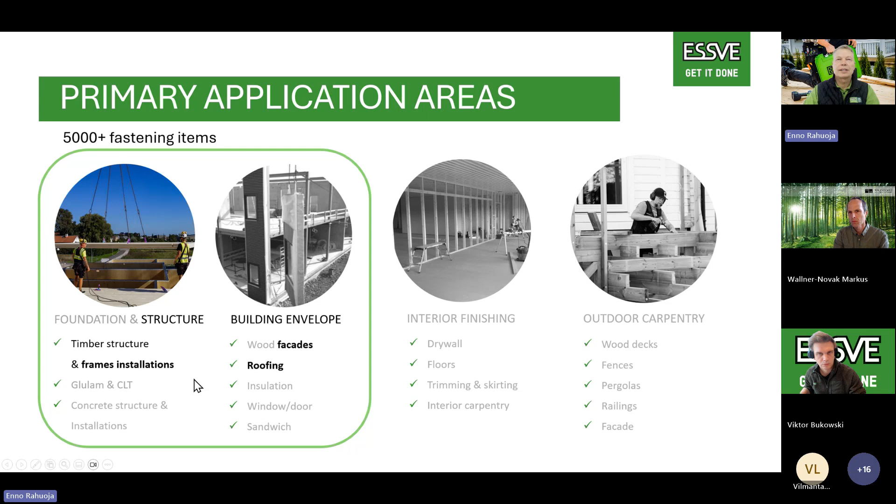What I wanted to say is that those are our 4 core focus areas, and today we are able to put together that green circle here, where we talk about roofs and facades, which is kind of the building envelope, and then it's a frame installation system. So this is the subject where we dive in from our mix of product range. We actually go deeply only into that insulated wall or roof area.

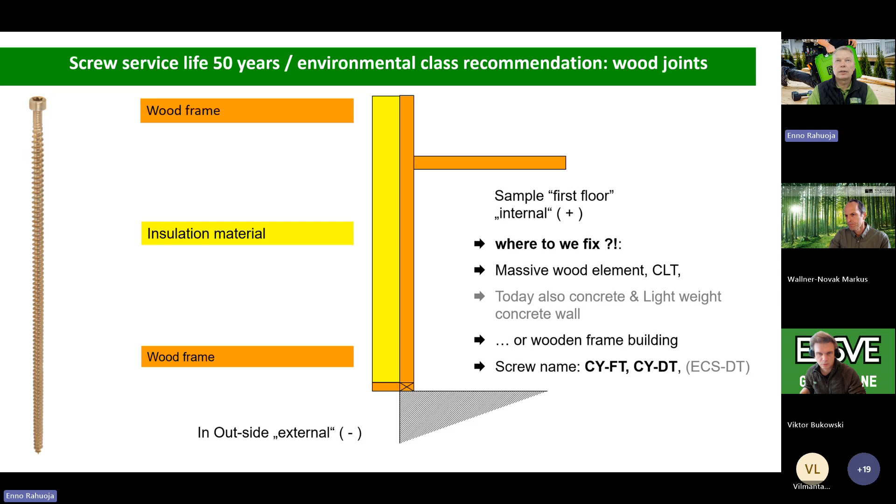The subject shortly. When you have some kind of timber frame wall, then in a frame wall, it's an option to put full insulation on top as the first step. Normally you build that up with brackets or a cross batten framework, but today's subject is you can have full insulation on it. Then normally you're going to have the wind barrier, which makes this application internal. And in this application, we are looking at a 50-year working lifetime. And I have put here some recommended environmental classes for the wooden joints as well.

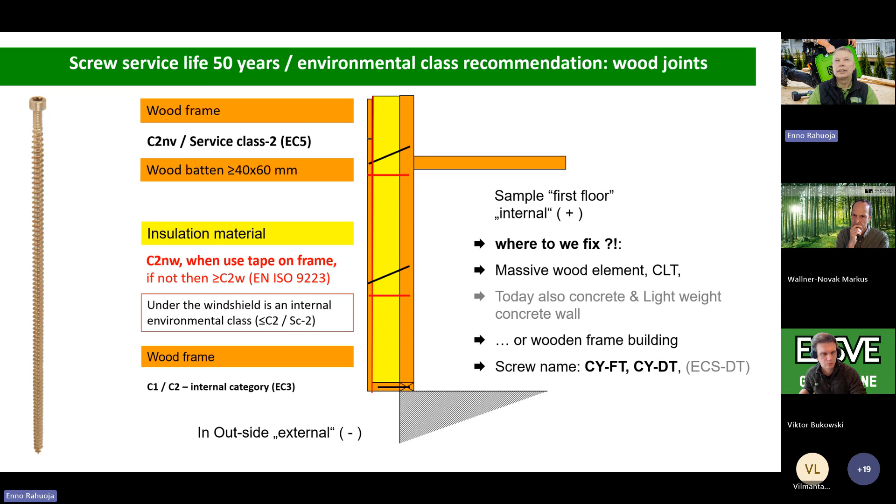Now we're coming to the framework. The framework we normally fix first with 2 or 3 screws to get it leveled, but also cross-fixing, so we get the frame nicely fixed. And according to the calculation tool, we do the distances here. In the next step, you need angle fasteners, which take all the vertical loads. That's also according to the calculation tool we're going to introduce later, and then comes the facade. So this is pretty much the subject Markus will dive into. He is our support person and developer of our so-called software.

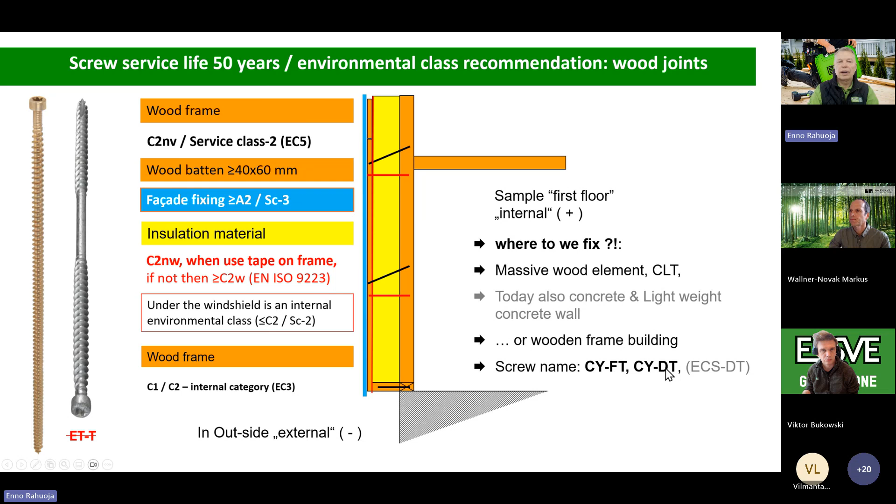I will remark that in the ESSVE range we have the well-known ET-T screw, which is a double-threaded screw. I have marked it red because the double-threaded screw ET-T is not recommended for this application, because here the second thread has a different geometry and has a traction effect, which means it pulls elements together. And when you fix it, it's difficult to install and level the facade framework on it. So for that, we have other fasteners. Either you use a full threaded screw from the ESSVE range, or we also have a double threaded one with the same geometry, called CY-DT. This product also has ETA approval, and it is approved for roof and facade, having CE marking.

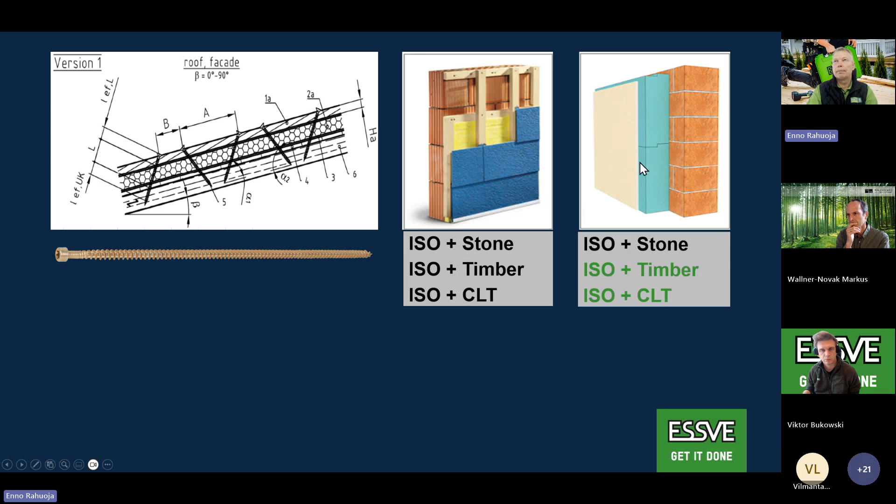Here on the right hand side, you see typical facade elements where you build that up. I have a brick background, but it could be cross-fixing of different timber applications, or it could be a wooden wall with an ETICS type of solution that you want to renovate. So you can do it for CLT new buildings or renovation if there's timber behind it.

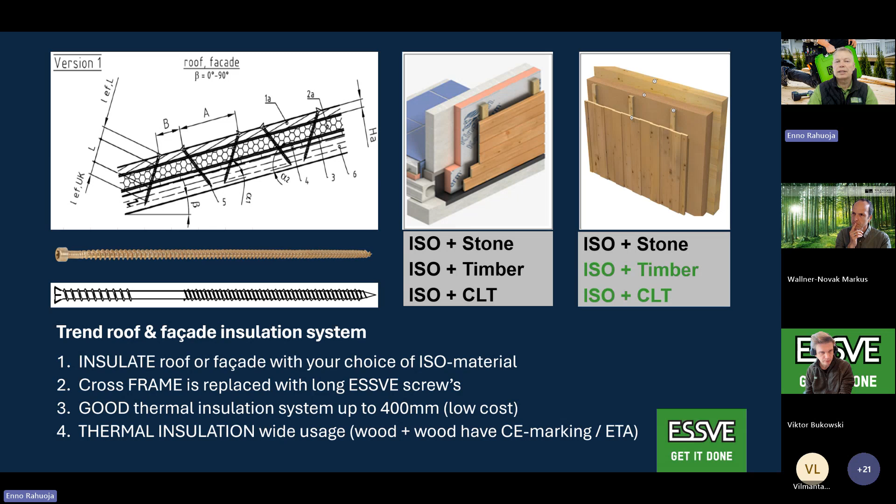We have 4 key arguments. Insulation in roof and facade areas. A cross frame is not needed, so you can replace it with screws. Good thermal insulation up to 400 millimeters. And thermal insulation has a wide usage area. In Eastern Europe, we also develop further on timber to concrete applications, but that's not today's subject. Today is more timber to timber.

But here we go. We have Markus. You will get the overview of the description. He's a timber construction software developer and leads research projects on fire protection, timber construction, and timber connectors.

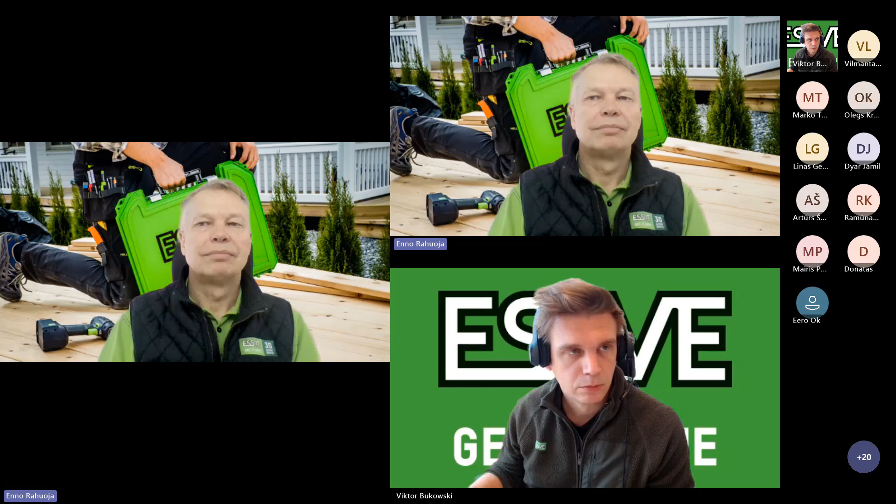So I will share my screen. What I want to do is give you a short overview of the systems, a little bit about the technical background, and then dive into two examples: one for the facade and one for the roof. It's always brief when you show a design tool—you can only show a little. But as an engineer, you have to consider more. It always looks very easy when you show it, but that's in the nature of this.

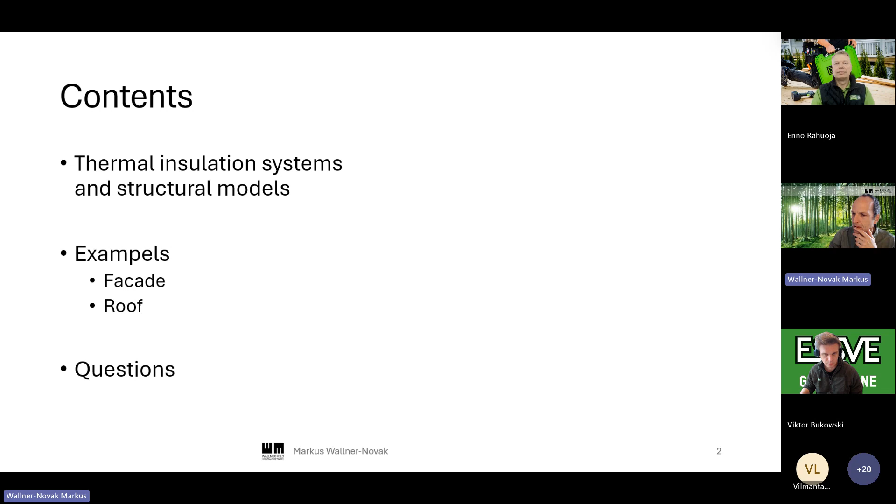So I start with the roof because that was the last slide we saw. There we have two different ways to either newly install or, very often, to refurbish and thermally insulate later.

The one is with so-called hard insulation. It's a more or less incompressible insulation, and the screws hold the roof structure against sliding down, so they are inclined. There's a mechanism where the screw goes into tension and the insulation catches the compression part, which is not much, but it can transfer it. On the other hand, we have a few screws responsible for wind suction, depending on the weight of the cover, and the other screws.

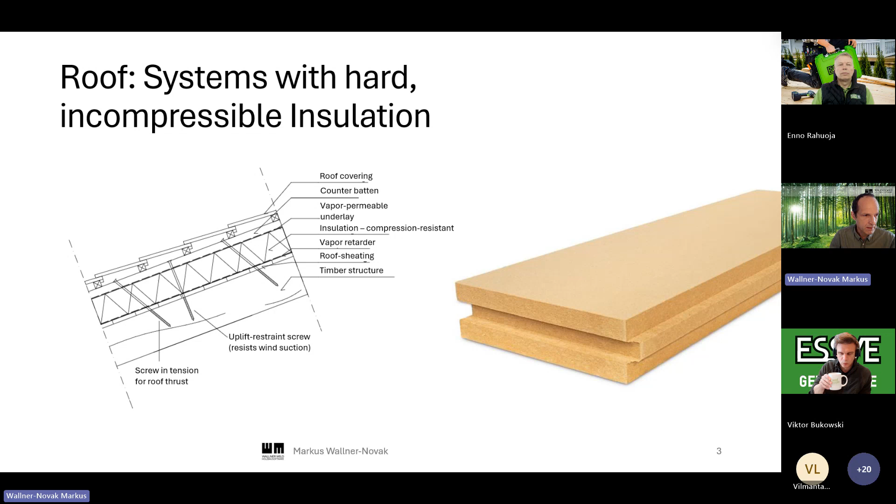Then there is a second system where you can use soft insulation. There it's more like a stilting system, so the insulation just insulates and doesn't carry any compressive loads. You keep a distance—it could be a void as well, but you want to use this space for insulation. So these screws are in compression and tension, and depending on the loads, you transfer the loads through the screws, which keeps the distance.

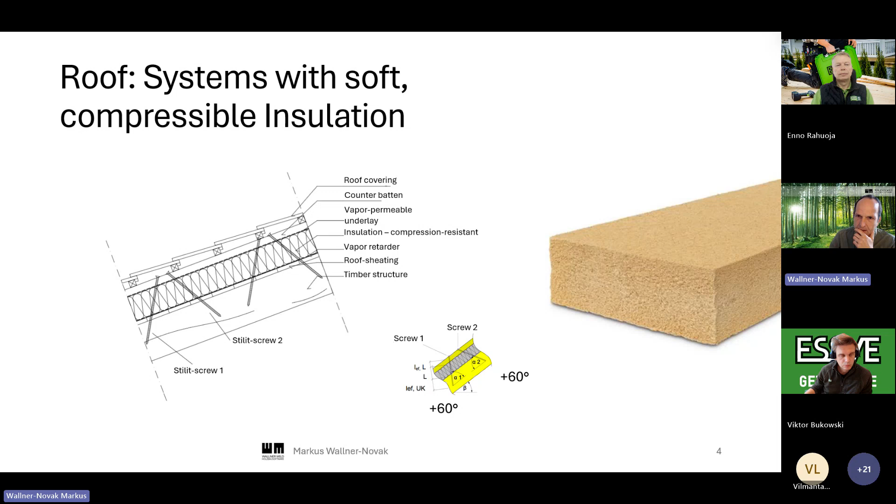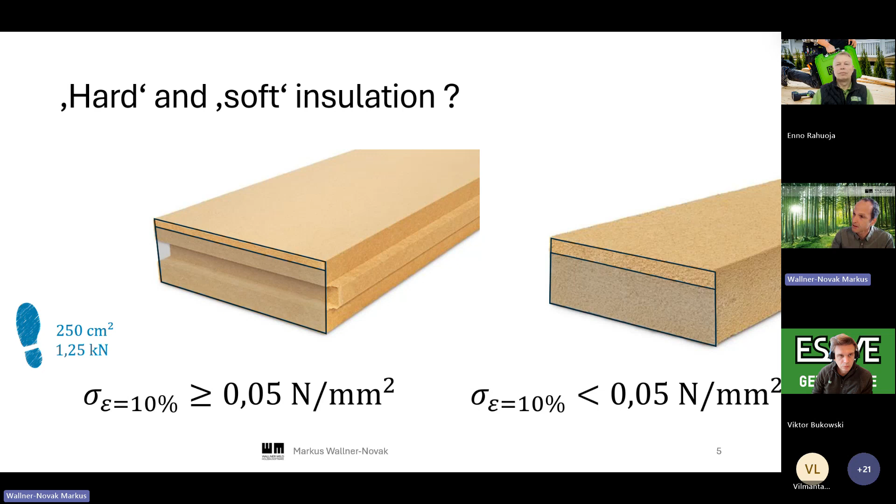There's often a question about the difference between so-called hard and soft insulation. It's not a very exact term, but the difference is the stress you can apply until the strain is 10%, which is 0.05 Newtons per square millimeter. If you calculate it—easier to understand—if you step on this insulation, you have about 250 square centimeters at the bottom of your foot, and a heavier person would produce this stress. So if you step on it and it compresses more than 10%, it's probably soft insulation; if it doesn't compress much more, it's considered hard insulation. The producers usually define this, and we have different products in the software as well.

Then there was work to do with the modeling and what can break—that's the engineer's job. Murphy's law says everything that can go wrong will go wrong, and we want to avoid this. So that's our way of thinking: we consider all the different mechanisms that can lead to damage, to prove that they won't.

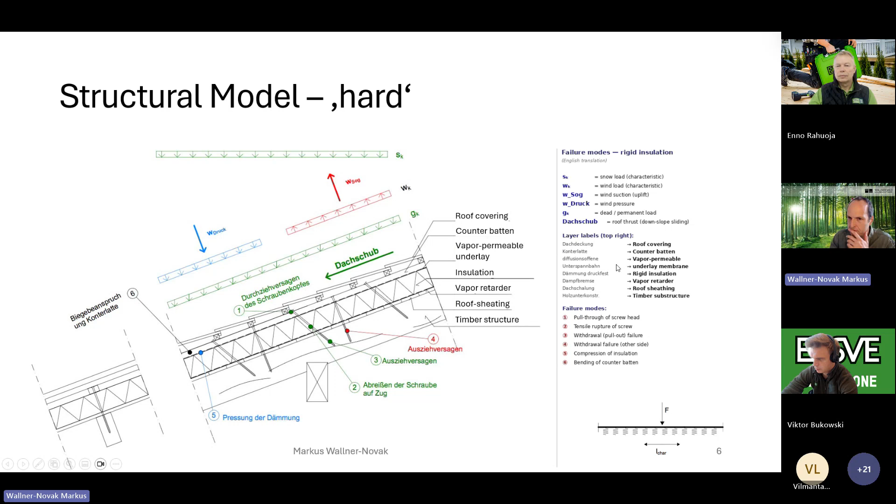This is a bit mixed in language, but I added translations so it's understandable. We have all the different failure modes from the screw and wind suction—shear from the roof, and different failure modes—and the software checks all these modes. We have different loadings: snow, wind, and self-weight are usually considered in the software. It's a little more difficult in terms of statics with this stilt solution.

Because then you have to find some structural systems. The counter batten works as a light beam on top, and then the stilts are like supports, like in this diagram here. And you can find some moment lines and can solve this. That's not so much of a problem, but that's a bit beyond the European technical approval that ESVE has, and that's implemented in the software.

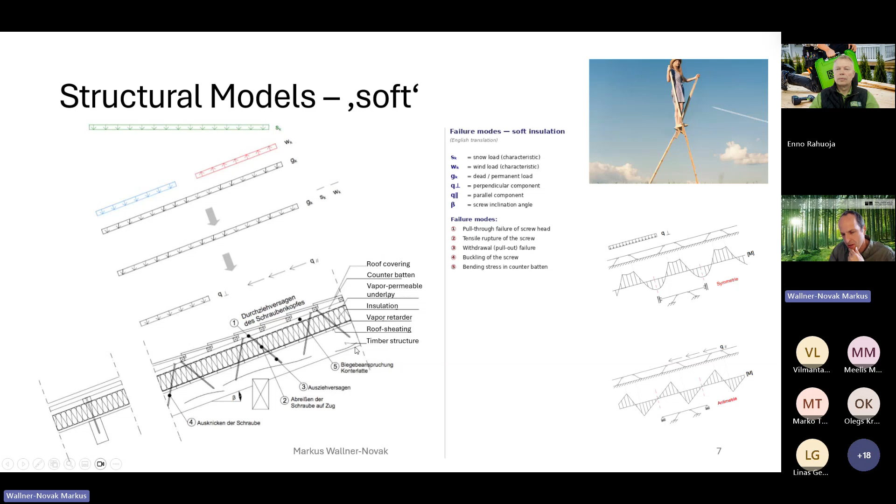So the roofs are a little bit more complicated in terms of structural models. So this we solved first, and then we continued with the application in a facade.

And I will, in terms of examples, start with the facade system that Enno just also showed. Usually we have one screw vertical and one inclined, and you can set as ever you want. We could also tilt both screws. You can define these angles here, the top screw and the first screw and the second screw can have its angles. In the roof, it's usually 60 degrees, like we saw here.

So they're both inclined, and in the wall, as Enno also said, usually you set the distance first, and then you screw the additional lifting screws for the vertical load. And here you only have self-weight usually as load case. The screws have to carry the additional structures here, and you have wind compression or wind suction. That's the thing here. There's no snow load or something, that's clear.

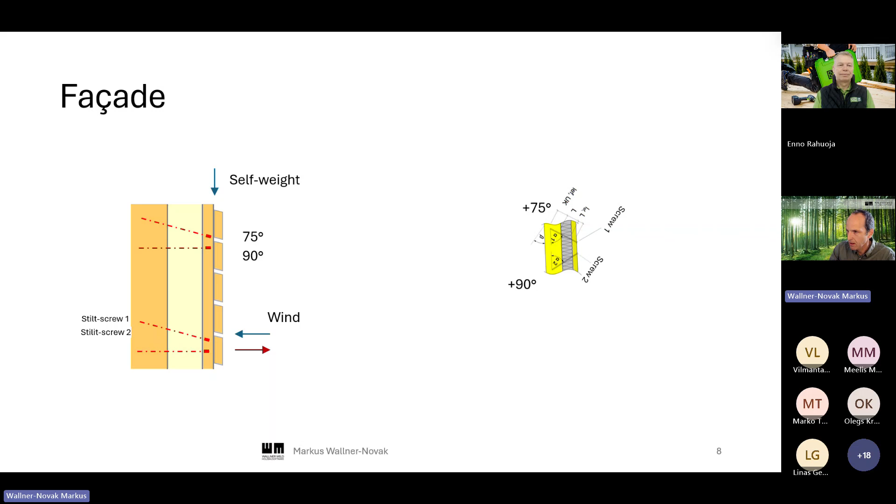Yes, so this is about the main structural thinking behind the programs we have. And I want to show you two examples just to see how the program works and give you some hints how you can apply and use this.

So we have one with a rather thick insulation of 320 millimeters, soft insulation. So this is compressible, and the screws have to take all the load. There will be no help, so to speak, from the insulation, no load carrying help. And then we have no loads, no other than the self-weight and the wind. And I used the counterbatten rather thick then because the screws need to have a certain amount of thread in the counterbatten, so you have to have a bit of a section there.

And the substructure is not really important. I chose 20 centimeters. It could be less. In CLT, it's sometimes only 12 centimeters. That can depend from case to case. And then, as I said, the screw angles will be 90 degrees for the first screw and 75 degrees, so it's inclined for the second screw.

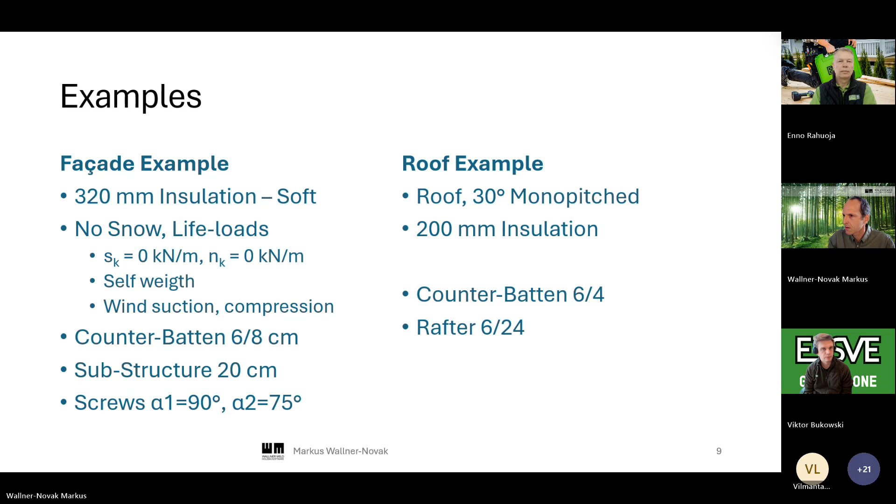And then we start with a second example for a roof. So to come to the... I just changed the screen. It's easier for me then.

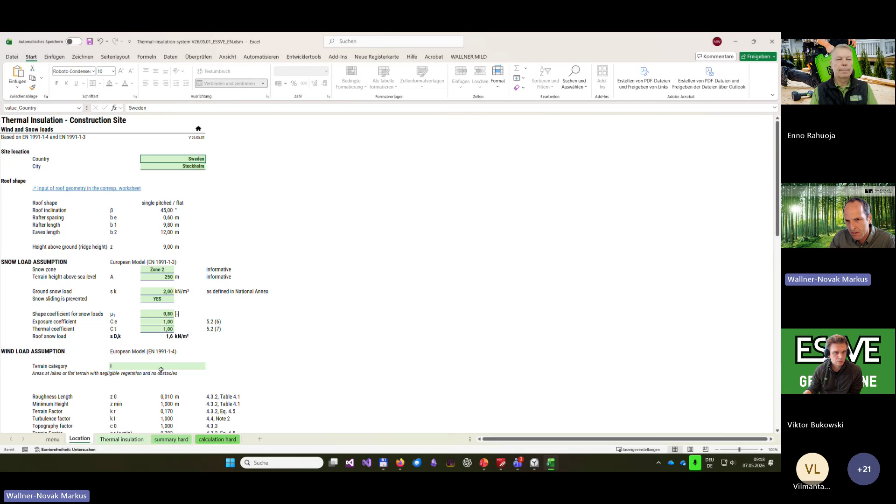And then the structure is relatively straightforward. You could set data from your site location. That's more for the roofs than for the facades. I will use that for the roof more than for the facade. So because we want to have the snow and the wind load, we could do this also. Maybe let's do this also here for the facade, because we want to know about the wind.

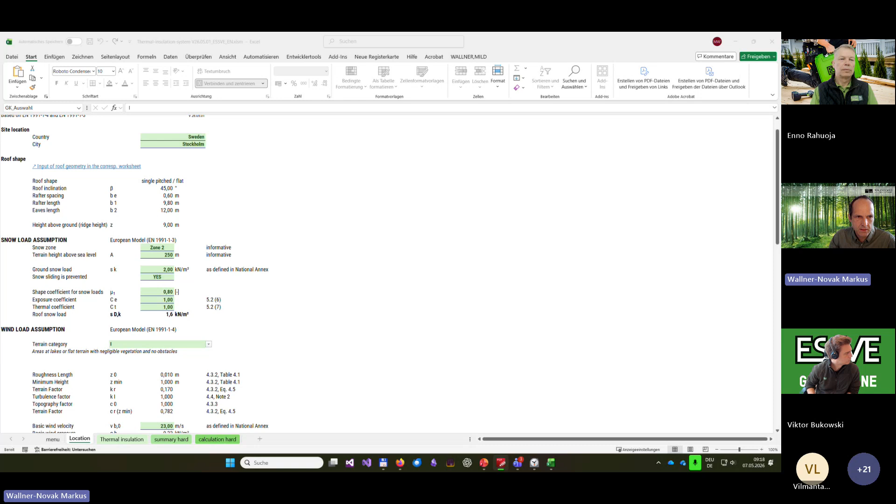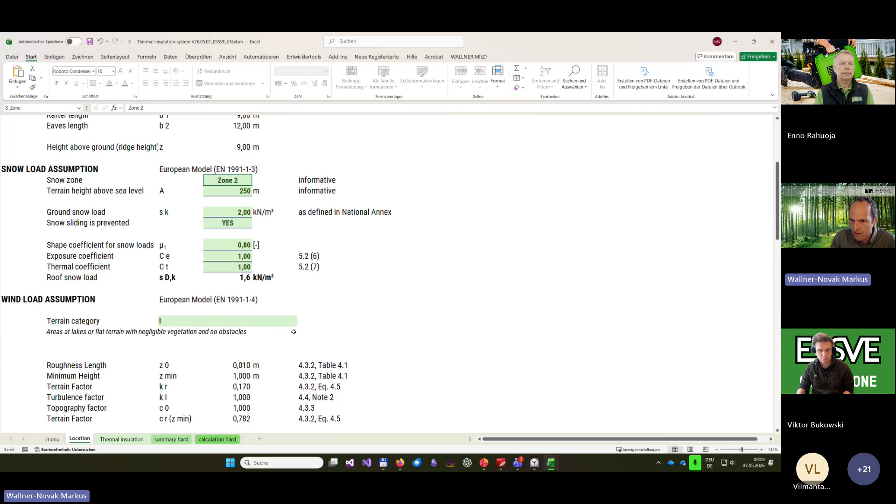So we could just set some values here. So we want to input some data here from Estonia, Tallinn, for example. The geometry will be set later, and then the snow load is not really interesting, as I said here, for the facade system, but we could say we are in terrain category 2, and our basic wind is maybe 21 in Estonia, meters per second, right? So then we get this peak velocity depending also on the height, the ridge height, which we will set later. So it could change a bit, but we preset the place and inform the program how wind will be.

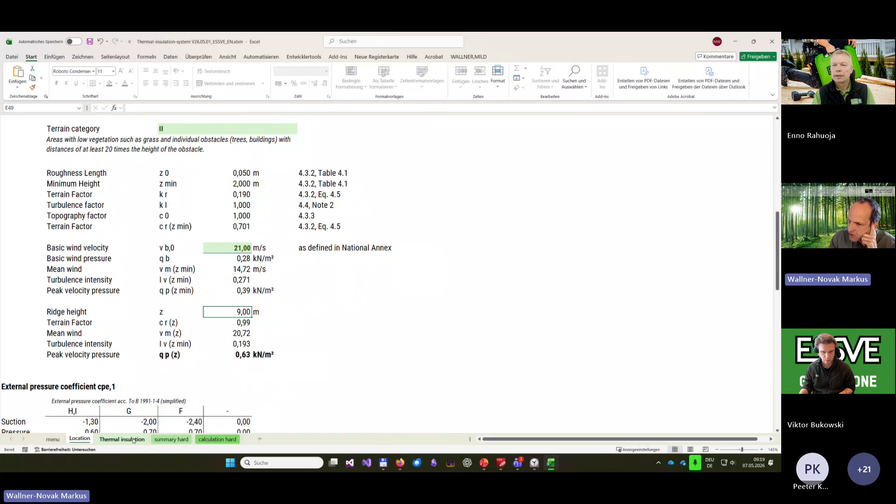Okay, so we also have these wind values here, and then we go to the second sheet, which is the thermal insulation itself, and then we have output. It's always a summary and a calculation. The summary is the short output, and the calculation is the longer output. And in this case, we have a soft insulation.

As I stated, we want to have this system with the stilts. The screws are stilting the counterbatten, so to speak. And we've set here the load for snow and also the live load to 0, because we don't need any live load here. And we can set a facade weight from the additional build-ups. That's usually rather lightweight, only 0.2 or 0.3 kilonewtons per square meter that comes from the loading.

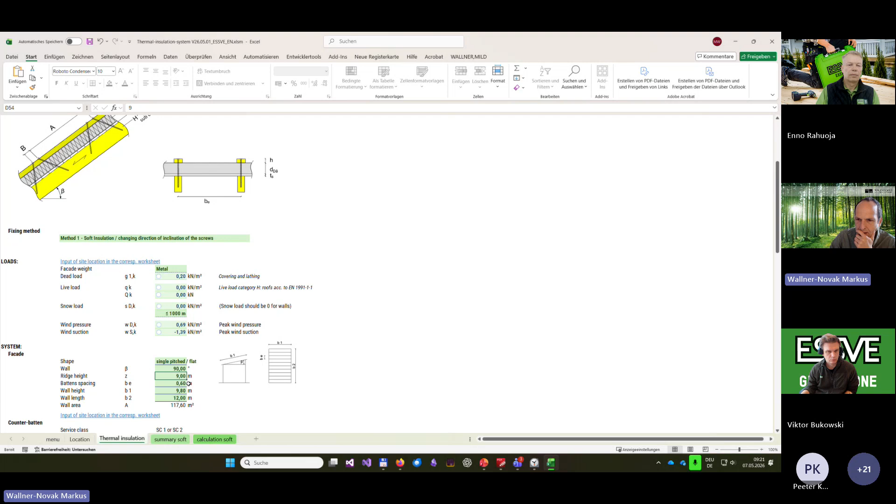And then here we have 90 degrees. So this is a universal tool. You can use it for the roof and also for the facade structures, for the walls. And we can have a batten spacing maybe of 0.625 meters. That's sometimes or often used, and the height could be maybe 6 meters. And also the wind is calculated then for the 6 meters.

And then we have the counterbatten dimension and also the quality. Usually it's a C24, and I used 8 times 6. I will give you the information later. We can see if we reduce what will happen then. So I have a rather large counterbatten.

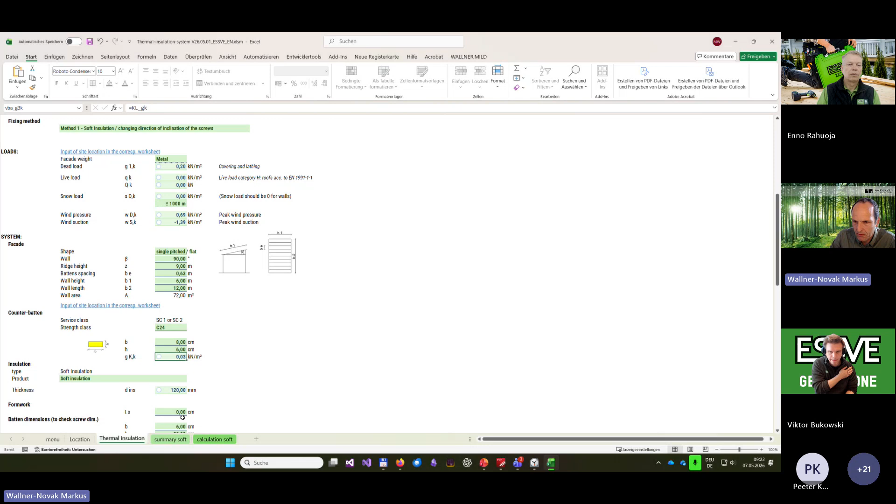And then we said we have 320 millimeters of insulation. And the batten dimension could be, I don't know, 10, 20, or if it's a CLT, it could be 100 centimeters - like a 1 meter stripe. That doesn't really matter, the width is not so important. It's just some information for the program to deal with the screws also.

And then we can set which screw we want. By default, it's the shortest screw is selected, which is seldomly correct. And you get the information - first, here there's a block about the geometry of the screw, and the program checks all the length values and also the thread length in the counterbatten and so on.

So for the input, we get an information here about the length that is geometrically feasible. So it should be longer than 470 millimeters with the 60 degrees. And we have to change this. First, we want to set this to 75 and 90 degrees because we have this system and the length changes a bit.

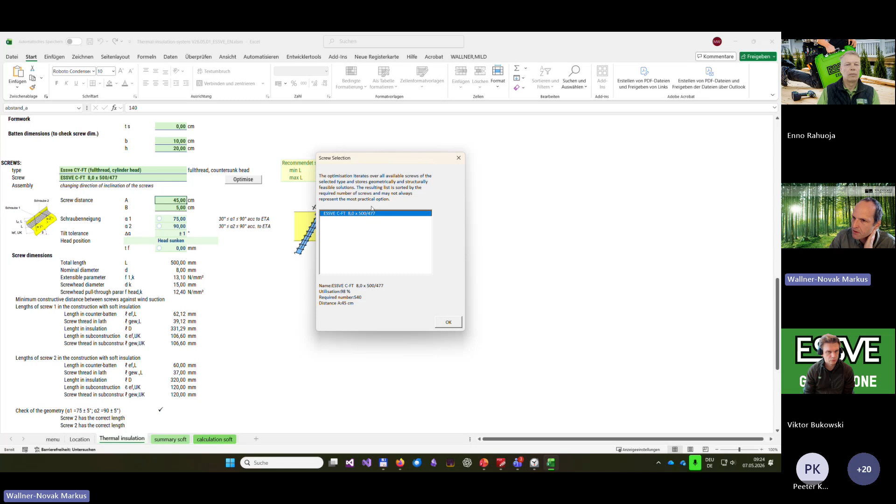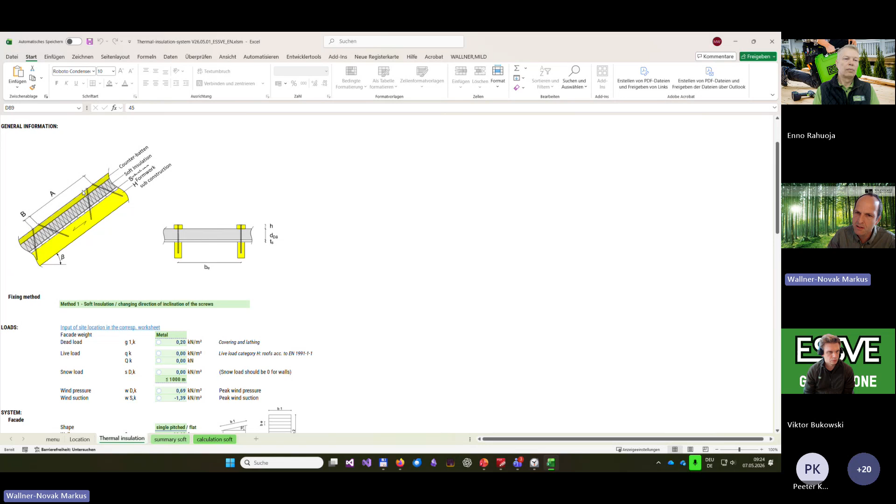And the only thing now we have to set the screw distance, or we could say optimize. So then the program looks for the screw that's geometrically feasible and also changes the screw distance. So every 45 centimeters, that's the result the program finds. We have to scroll up - so every 45 centimeters, it repeats. So the actual distance is 45, and between the two screws, it's 5 centimeters.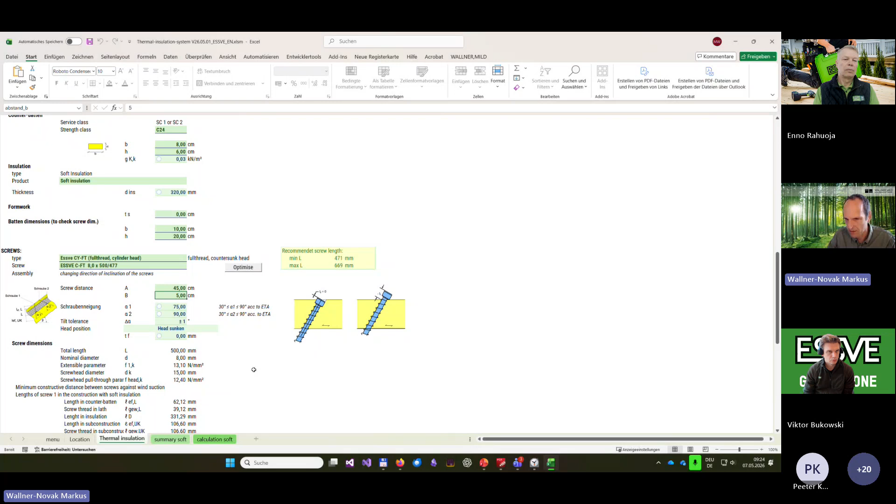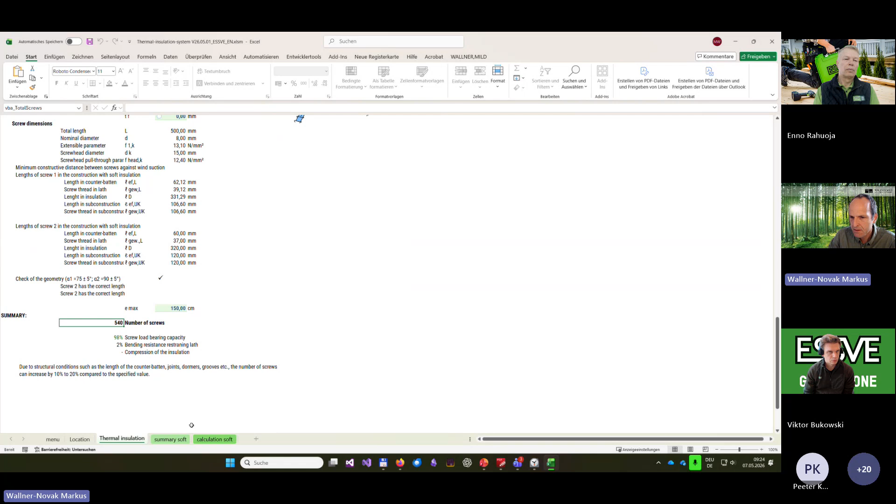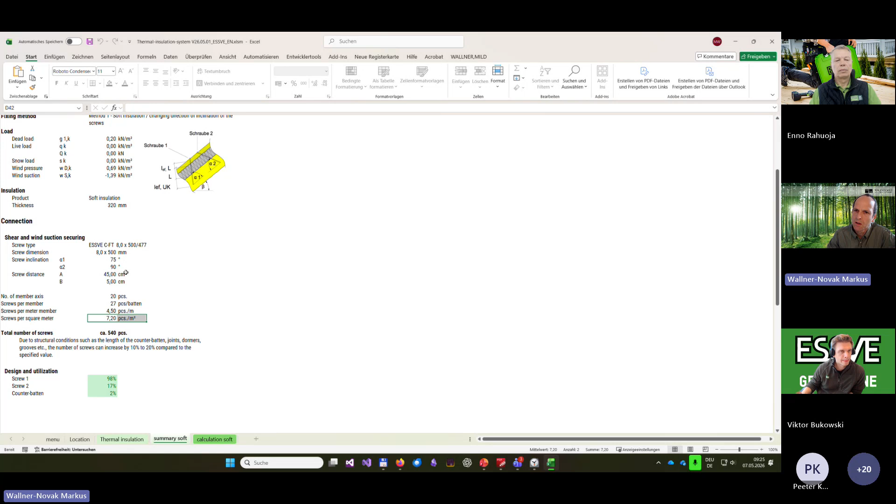That's usually a default, you can change this also - that doesn't change much. And then as a result, you get the number of screws. You get 540 screws in this case for the whole area. And in the summary, you can see how many screws per batten or how many screws per square meter wall you have, so that you can calculate and estimate the price for the screws in the project.

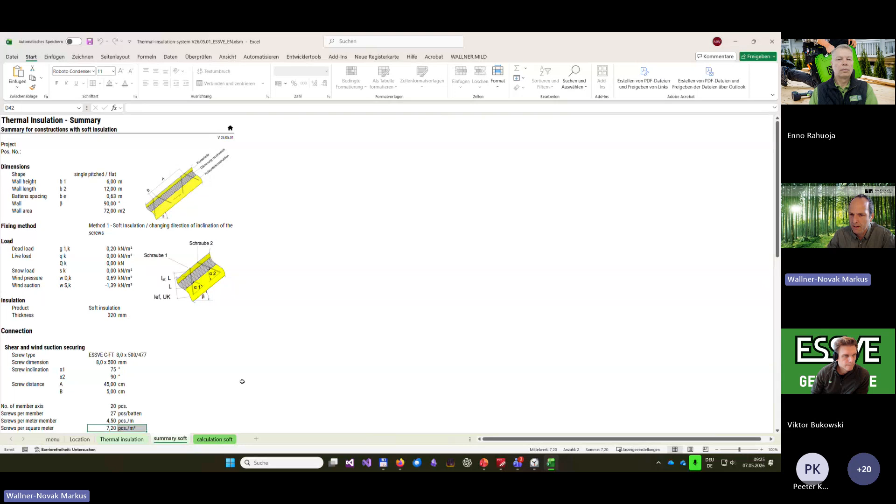And this is only a one-sheet information, which gives you most of the required information. And if you want to see the details, you have all the calculations here with the models and also the screw design of this installation.

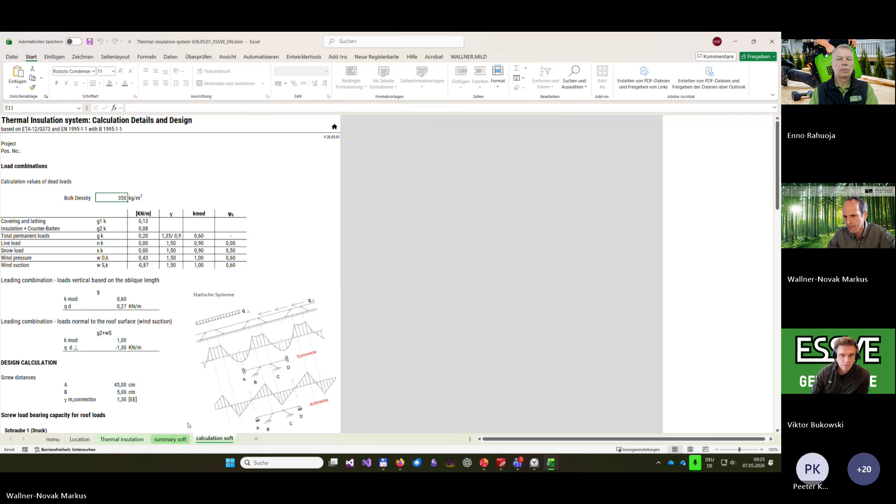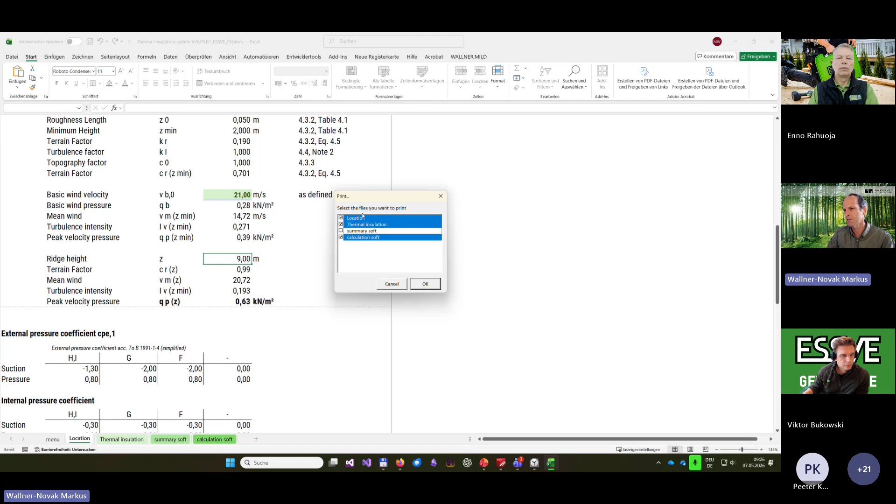And then when you finished, you can go and print. This is a German version now, sorry, but it should work also in your language, in your Excel language. And if you press print, then you have the option to select or deselect parts. You could just print the summary if you want, or just print the location and the calculation - whatever you want. So you can choose between the sheets that we have.

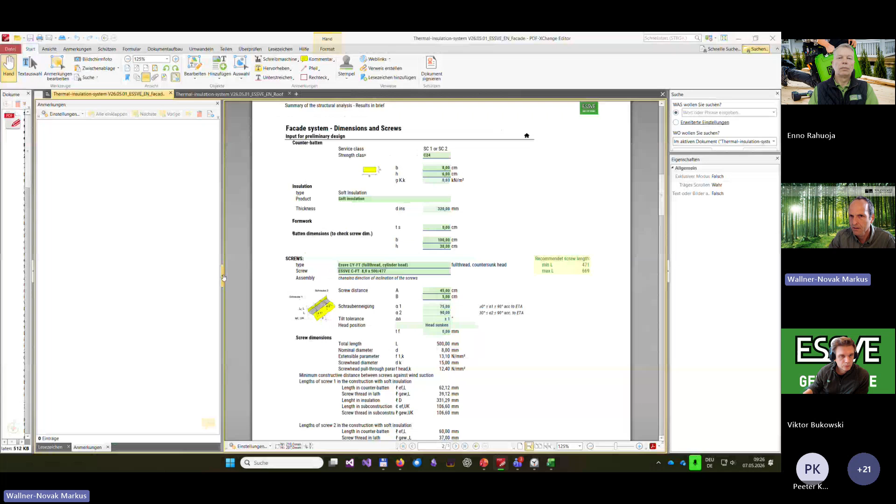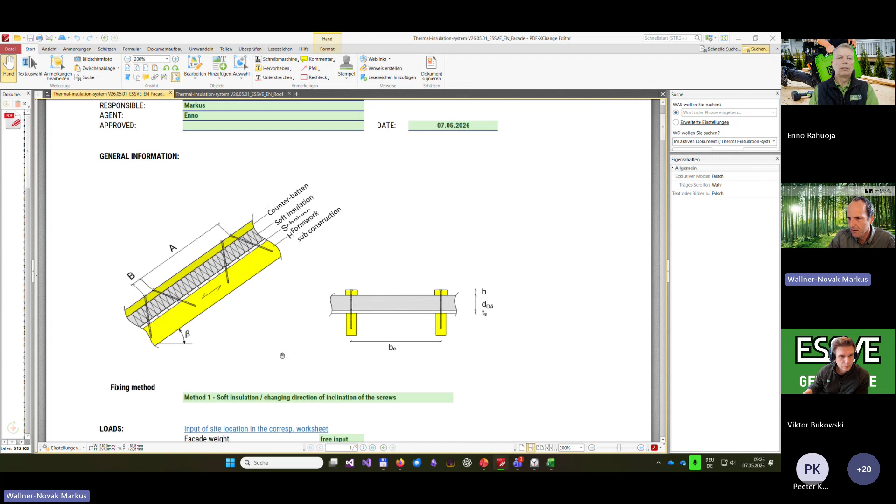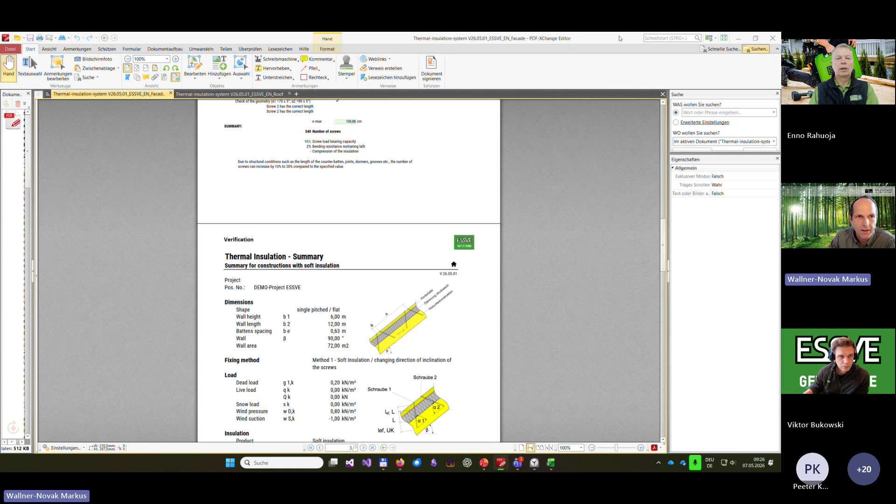And the result then is a PDF file that looks like this. So you get here the information about the facade. We did fill out the required input data for this example at the moment, and you get all the data you need for the design and also for the producers, so to speak, or for the installers. For installers, that's the word.

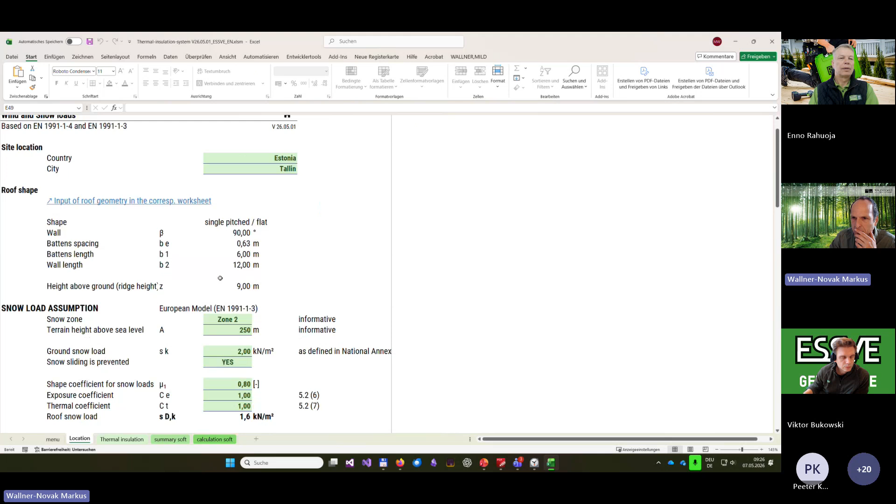Thank you. And the other thing we could do, just a very brief look: we could set here a roof structure. Then we could maybe try with a hard, incompressible construction, and maybe have a 30 degrees inclination. And the inclined screws have 60 degrees, and the other one is vertical for the wind suction.

And maybe here the insulation thickness is less than we had before. It's maybe 20 centimeters, 200 millimeters. I think that's what I wanted. And then I can here also press optimize, and then the program tells me what size of screws is feasible. Usually it's the narrowest and the shortest possible that's suggested.

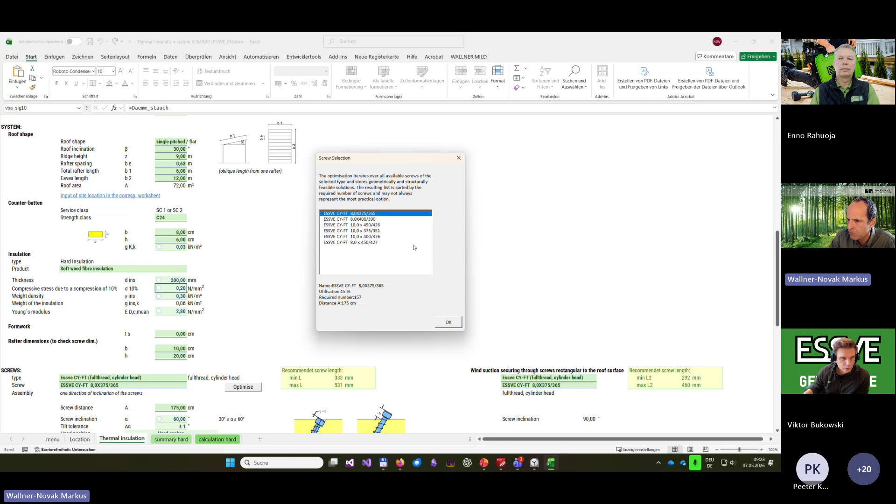So you can choose this one, and the program then also checks the geometry. That's the first thing, and then also calculates the number of screws. In this case, that's something we need to set. I have to reset here. These round buttons are to reset the values.

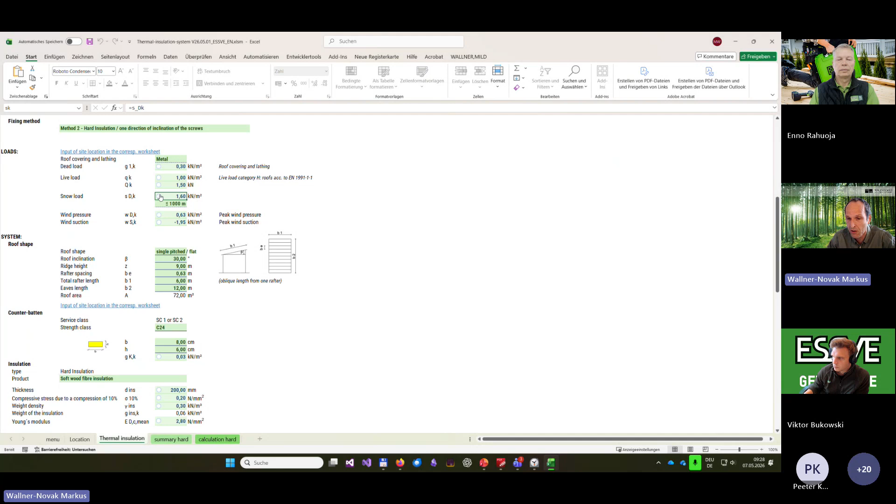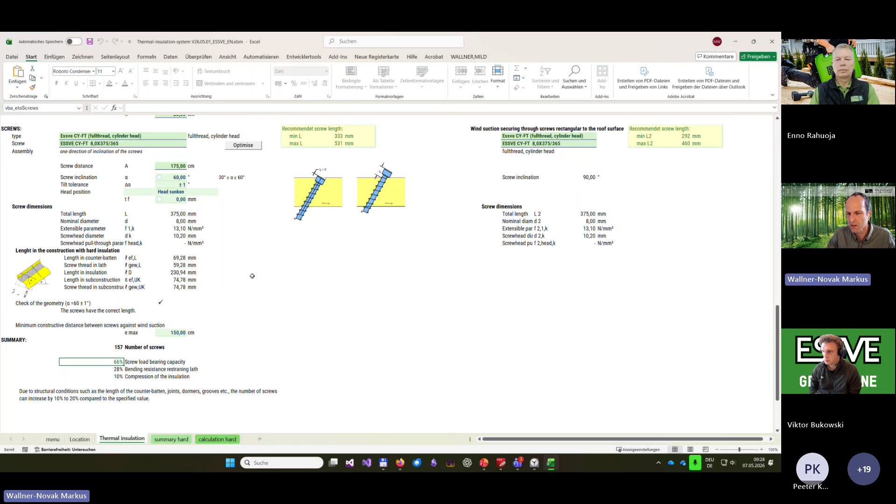I set the snow load to 0 because it was a facade, you remember. Now I reset to the default snow load from the location we had. Now the values will change a bit. Yeah, it's 66% load bearing capacity of the screws, which is quite a reasonable value.

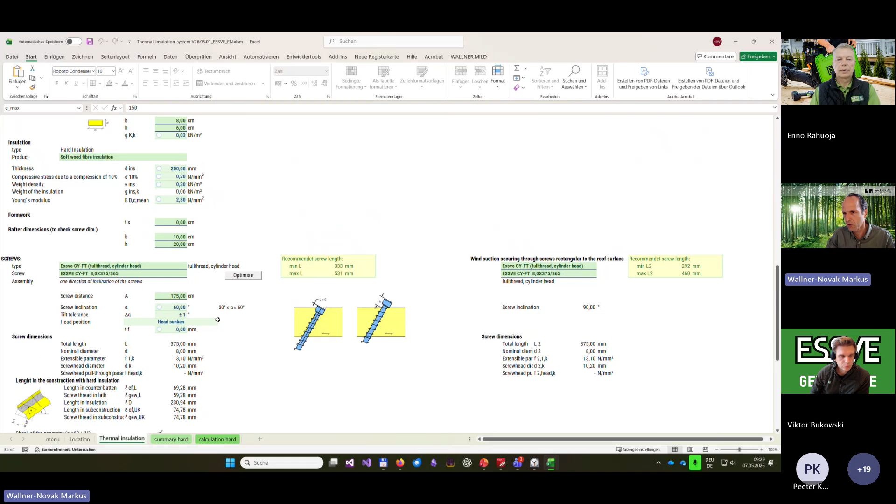And for the wind suction, we can set a maximum distance because sometimes the values are very low, and usually you want to have a certain amount of screws, each rafter at least 2 against the wind suction. Yes, and that's another option to use this program for the single pitched or for the double pitched roofs.

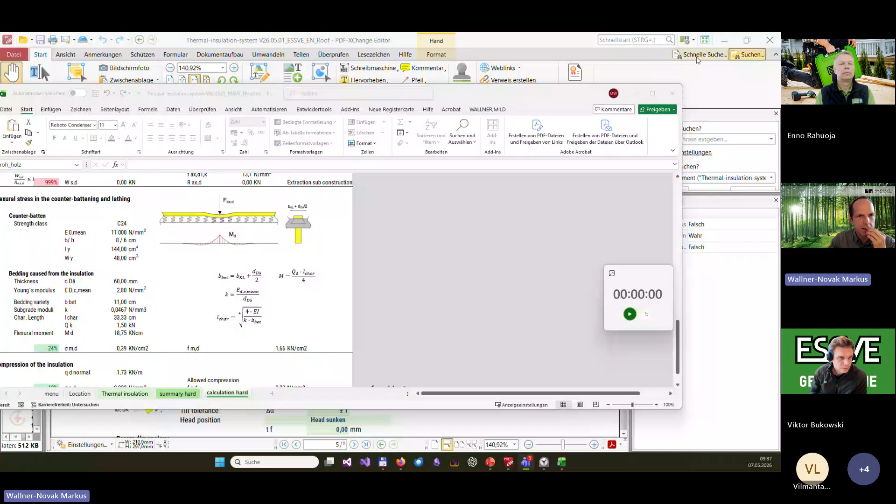We calculate here. This is the part of the counter batten, and you can see here the compression and the model for the moment, and almost everything is here. So you have the Young's modulus, the thickness and the bedding width. So there's not much missing to estimate. It's not so easy to calculate the exact value, as you know, but you can estimate.

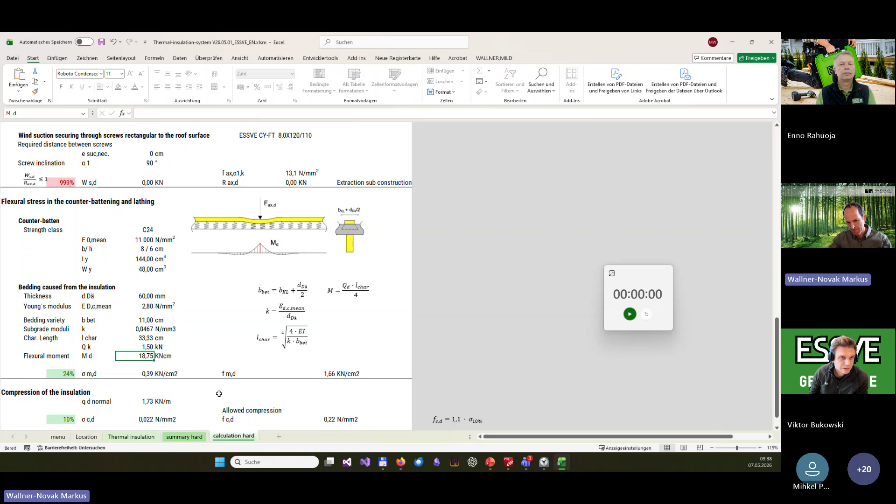But not in this direction. Rather, if you use it for the facade, you would want the displacement in the vertical. In this way, it would be in the horizontal direction. That's what you mean? Okay. You mean that coming from the tension of the screw a bit. Usually that is not much. It's relatively stiff. Yeah, we could calculate this one. We could do that. Might be interesting.

Coming back to the previous poll: 40% happy to use, 26 more focused on facade, few on roof, and some of them didn't feel it relevant. I have another poll as well, and then I will probably raise another question to Markus. So this is a little bit related. What application area are you looking forward to using it in your next project? You can also give multiple answers. So happy to hear your feedback.

What I had as a question is how to deal with a thin counter batten, because in Eastern Europe the counter batten they use is often very thin. Yes. So what is the solution then? Yeah, there's one thing, I'll share the screen again.

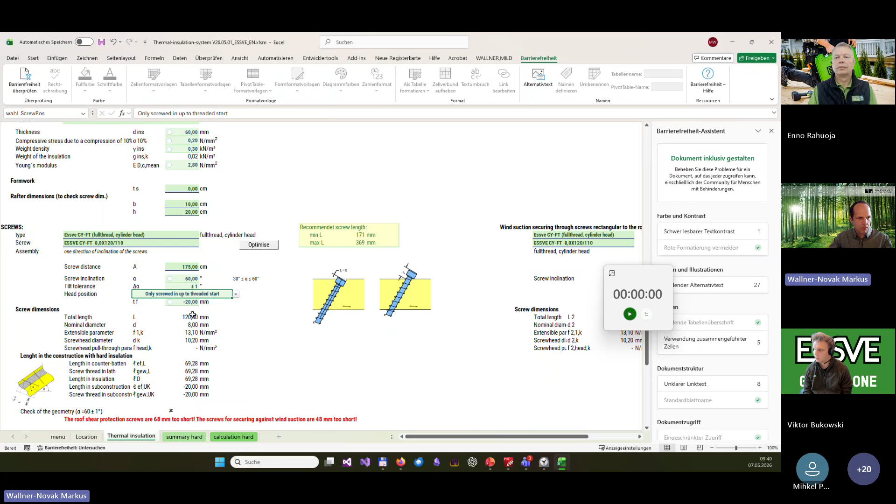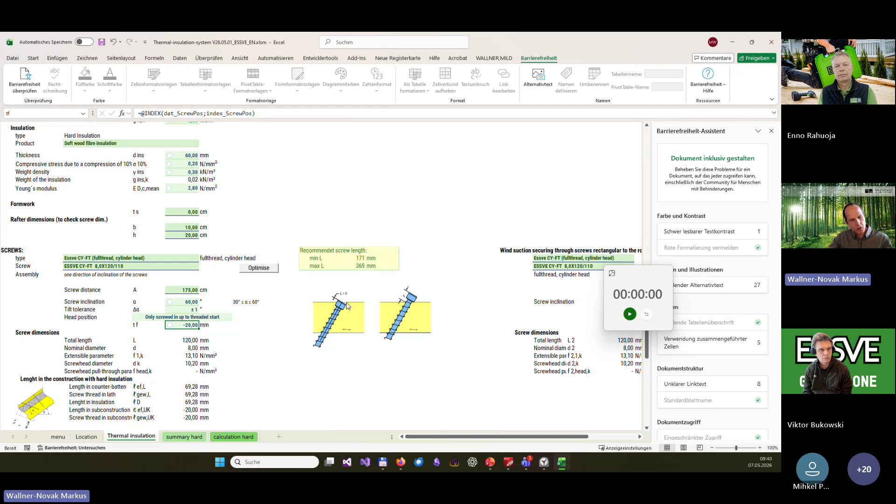And you can set this here: you can have a sunken head, you can have the head outside, or you can set it also to this thread start. So for this selected screw here, in this case it was 20 millimeters, because it's a cylinder head, from the very top of the screw till the thread starts. And if we lift it up a bit, then we can have thinner counter-battens as well. So we could have 4 centimeters as well.

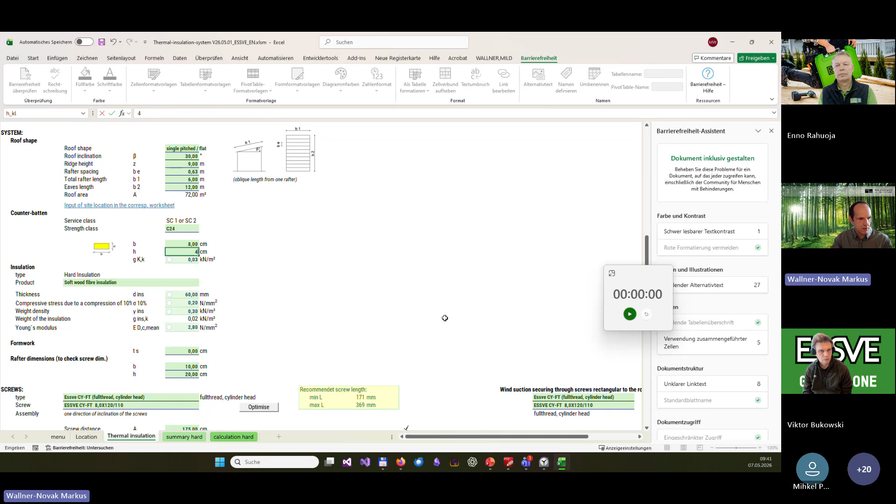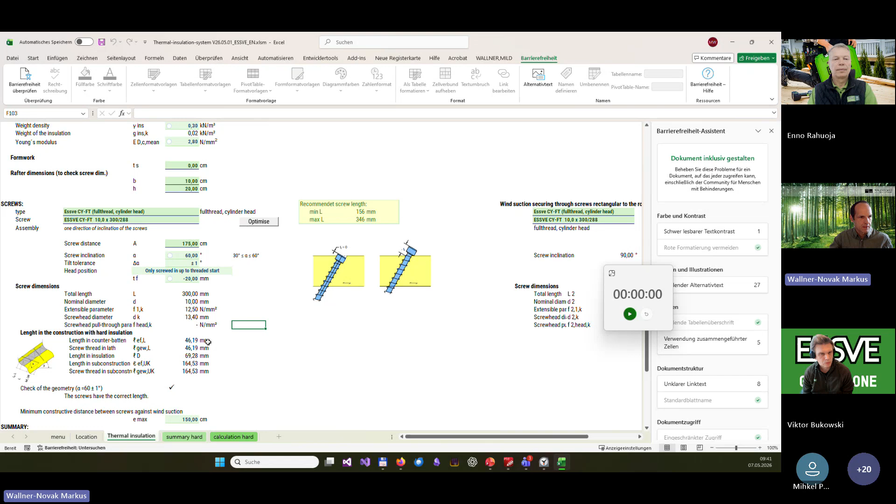Now the screw might be too short, but the length in the, so we should, okay. We have to have the 300. So then the thread is longer in the substructure. And if you now have only, let's say, 3 centimeters, it says it's not recommended in the European technical approval.

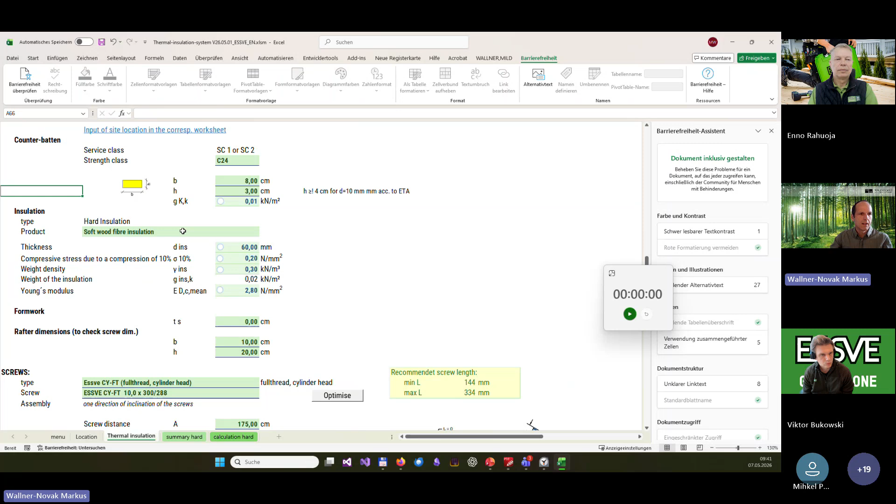You can still decide, I still want to calculate it. And if I leave 3 and set this to 0 and say the screw is 0, in this case it still works, but that's an option you can deal with. So if it's only a question of millimeters, you can set the position of the screw in detail.

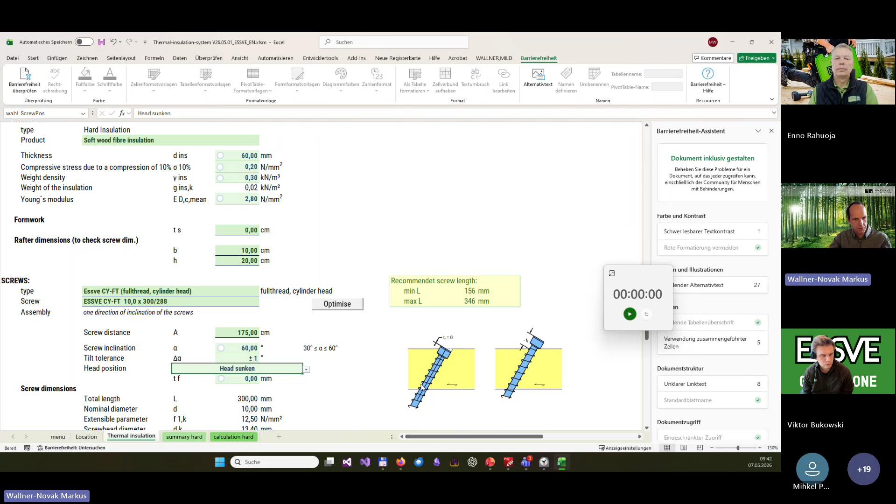Thank you. And as we are in time pressure, we need to close. I see, Mihkel, you have also asked a smart question, to inform everyone else: a practical question, can the construction worker actually hit the 45 millimeter rafter through the 400 millimeter insulation? A quick feedback: yes, it's a challenge. It's difficult in such an application, and we need good masters on the construction site who will handle that case. But it is possible.

Yes, and usually they have to put the line. I don't know what this is in English, but you have this colored rope, and you make a mark so that you keep your position. That's always important, also to instruct the installers. Yeah.

To end this academy, there is one more question. We have the EsSWood and SpecToolbox, which were previous discussions. And I quickly grab Oleg's question also: are screws with 6 mm diameter available for calculation? We use mostly 45 mm by 45 mm timber batten. Actually, it is a problem to use 8 mm screws. What is your comment, Markus, on that case?

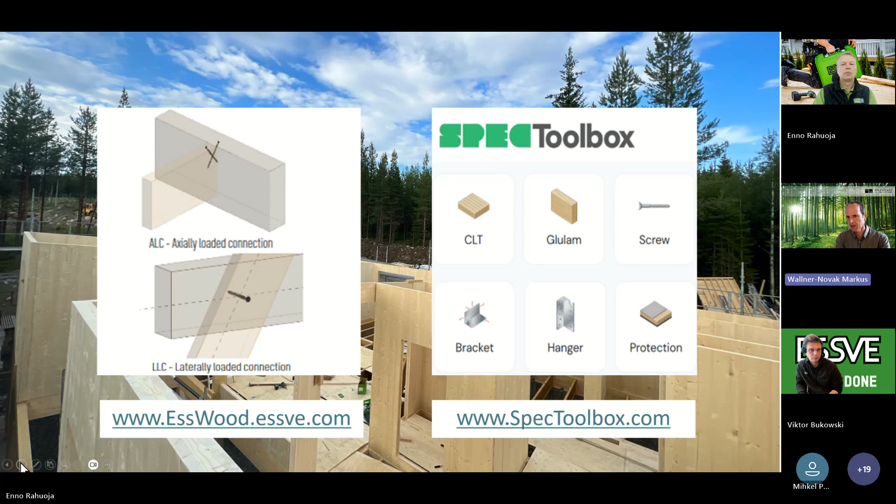And maybe quick feedback for Oleg is that often they change the battens to 45 by 70 or 75, or you go with 6, but 6 have limited lengths. So you're not able to go for a thicker insulation than maybe 150-200 mm. I think that's also the reason for the 8 mm, because of the length, and also that you don't want the screws to move too much, and 8 mm is better because they are more stable when you screw them in.